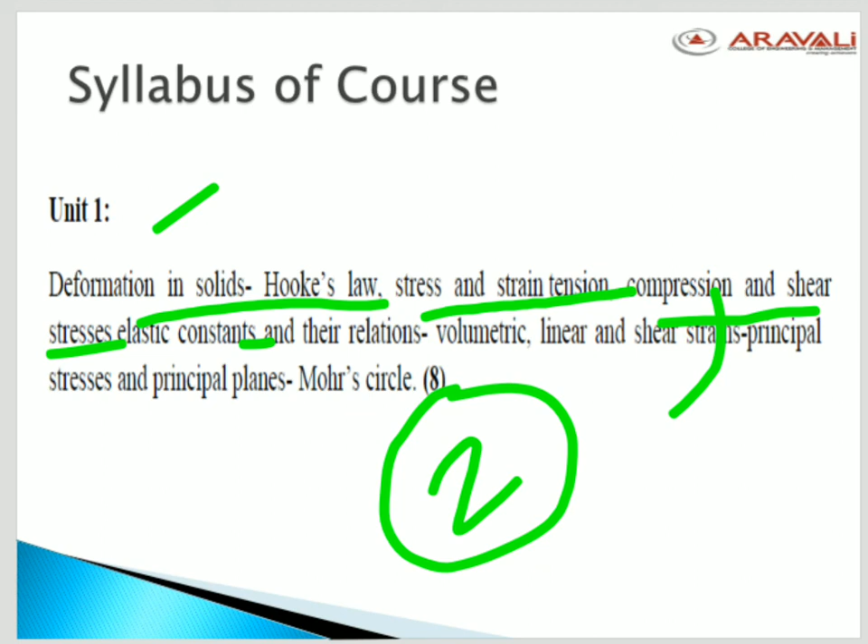You have already studied it in 11th class, where you studied about solids, liquids, gases, and the various stress strain diagrams for mild steel - various limits: proportional limit, yield point, ultimate point, breaking point - all these things you have studied. So we are going to discuss this in detail here. This is our unit 1.

Now we will see unit 2. Unit 2 contains shear force and bending moment diagrams, meaning the loading analysis of any structure can be done in this chapter. We will see the various types of beams and what are the various types of loadings on those beams. Then we will draw the shear force and bending moment diagrams for them.

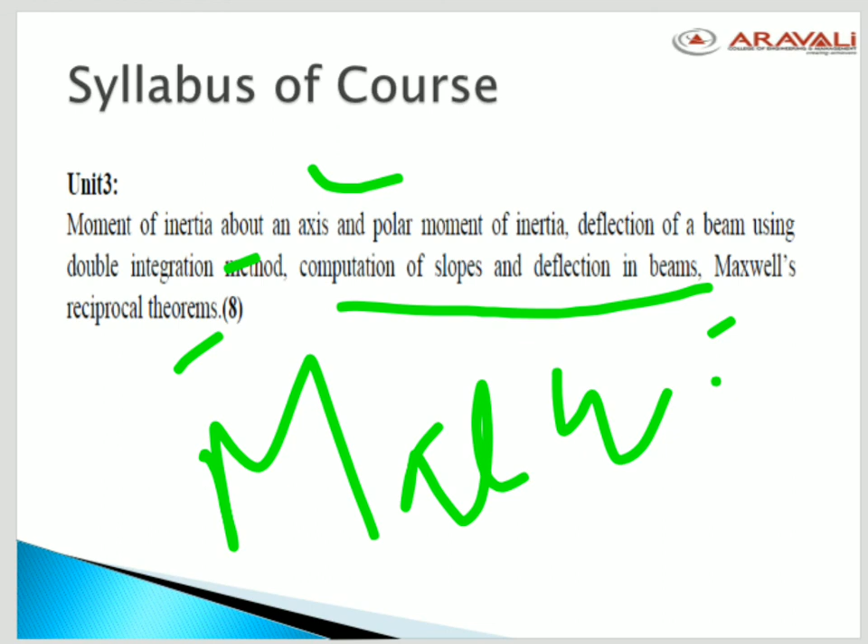We have a lot of methods to find out the deflection. One of the methods is the double integration method and Maxwell's reciprocal theorem, and then the computation of slopes and deflections in beams. We will also discuss Macaulay's method in this chapter, along with Maxwell's reciprocal theorem and Castigliano's theorem. So this is all about your unit 3.

Now we will see what is in unit 4. The unit 4 contains torsion, stress and deformations in circular and hollow shafts. Meaning, whatever your solid and hollow circular shafts are, what different stress distributions occur in them, what kinds of stresses are generated — all these things we will study in this unit.

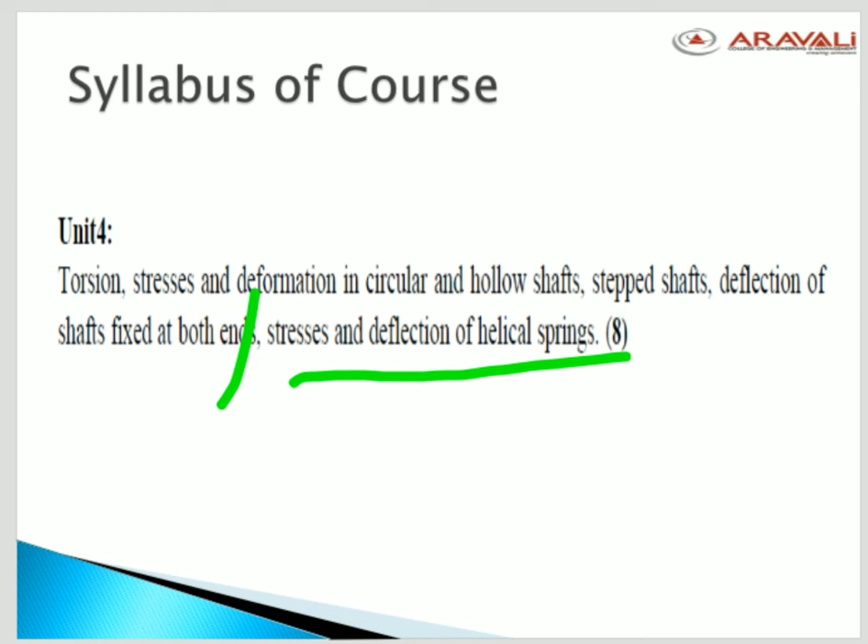Now our last unit is unit 5. The unit 5 contains axial and hoop stresses in cylinders subjected to internal pressure. Meaning, whatever cylindrical objects we have, thin cylindrical objects, the axial and hoop stresses that are generated when some internal pressure is applied to them — we have to analyze those.

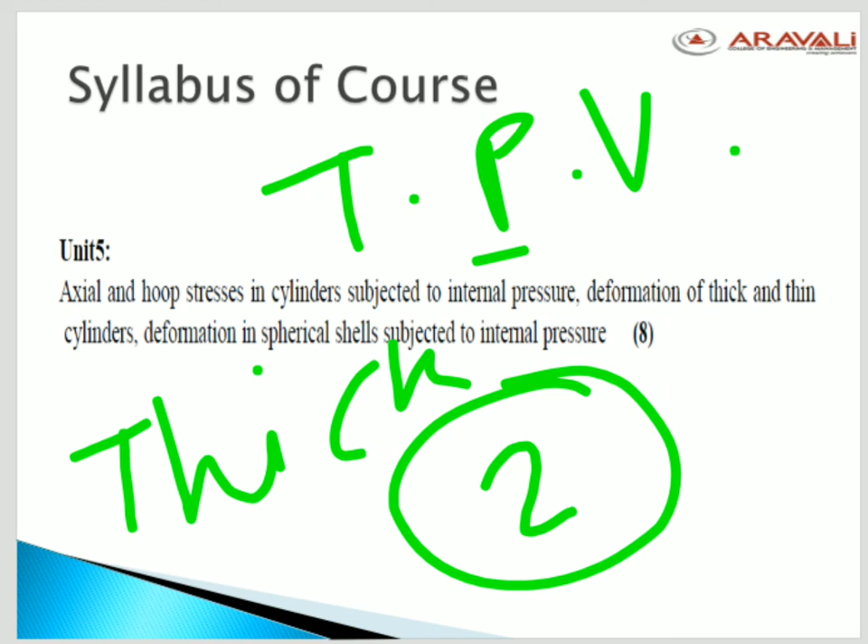We are going to follow some books like Egor P. Popov, then R. Subramanian, and Johnson. These are three reference books which we are given in our syllabus.

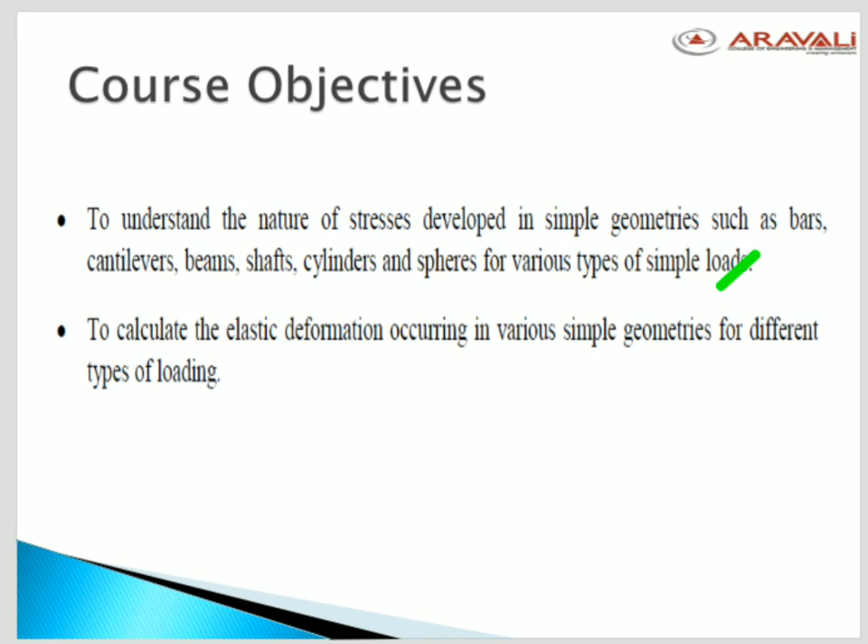Now, what is the course objective? The objective of this course is to understand the nature of stresses developed in simple geometries such as bars, cantilever beams, shafts, cylinders and spheres for various types of simple loading. Next, to calculate the elastic deformation occurring in various simple geometries for different types of loadings. So these are our course objectives.